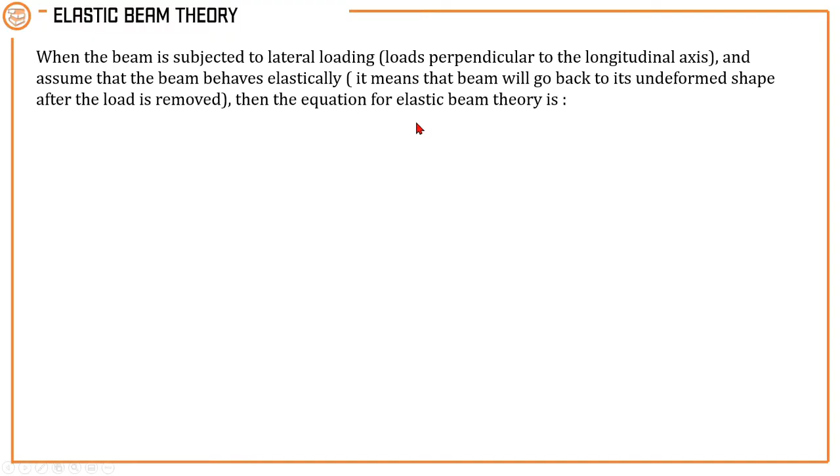And recall from strength of material, elastic beams are beams that, when loaded, will deflect. Then if we remove the load, it will return to its original shape. So then the equation for elastic beam theory is given by this one, wherein rho is the radius of curvature of any point of the elastic curve. M is the internal moment at any point of the beam.

E is the modulus of elasticity of the beam. I is the moment of inertia of the cross section. And if we multiply E and I, that is the flexural rigidity. So what we're going to do here is to derive this formula. Kung paano ba nangyari ito.

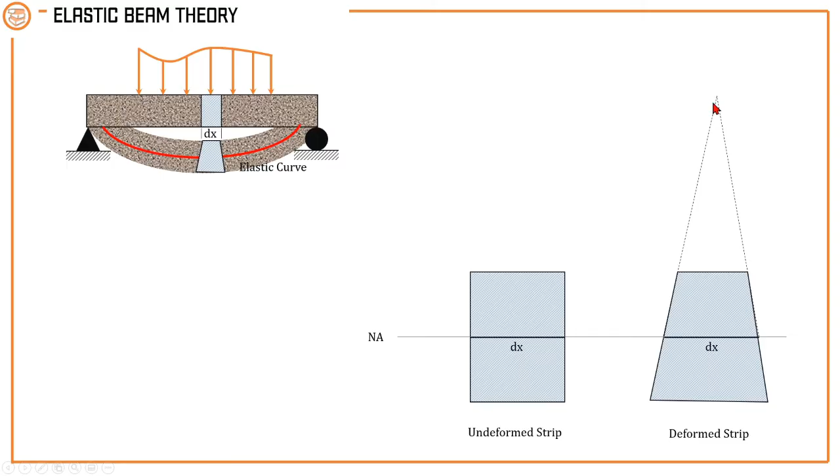If we will try to extend this length such that this will intersect, let's say that is point A. And if we try to measure that intersection point to the neutral axis, that is called the rho or the radius of curvature. Kung paano yung pagkakakurba nito. Actually, this is curved talaga. But since this is a very small strip, inassume natin na magiging almost straight na lang to. Since curved nga siya, meron siyang radius of curvature.

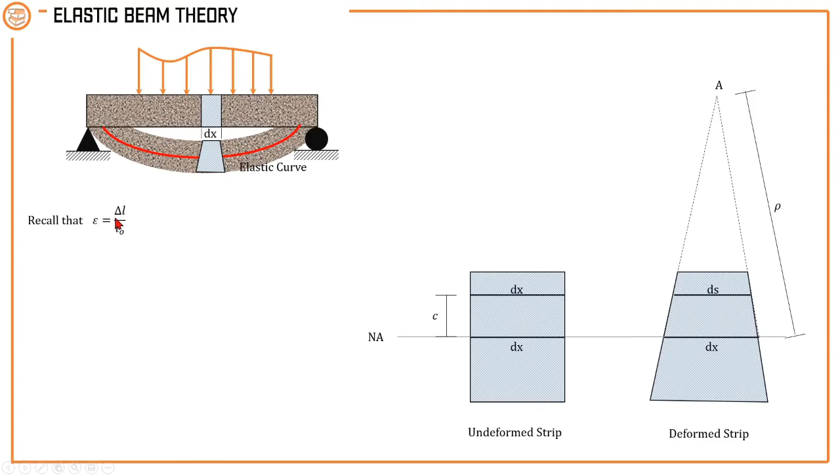Recall natin from strength of material, strain is equal to the deformation or delta L over the original length. If we are going to get the strain at a distance c from the neutral axis, ito yung magiging strain natin. dx, the original length, minus ds, that is the deformation or delta L, over the original length, which is dx. Simplify natin, ito yung kakalabasan: 1 minus ds over dx. Let's say this is our equation number 1.

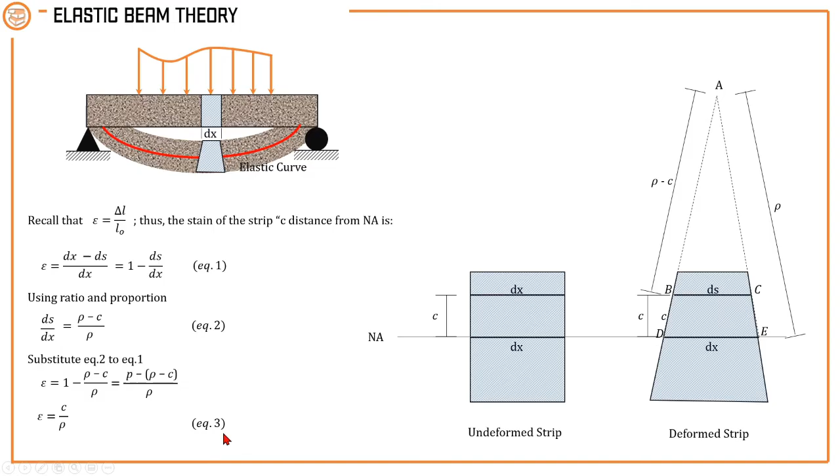Next, recall natin Hooke's law. Strain is equal to stress over the modulus of elasticity. Pwede natin i-substitute itong stress over E sa equation number 3. So stress over E is equal to C over rho. That is our equation number 4. And from bending stress of the beam, stress is equal to Mc over I, or the internal moment multiplied by the distance C from the neutral axis over the moment of inertia.

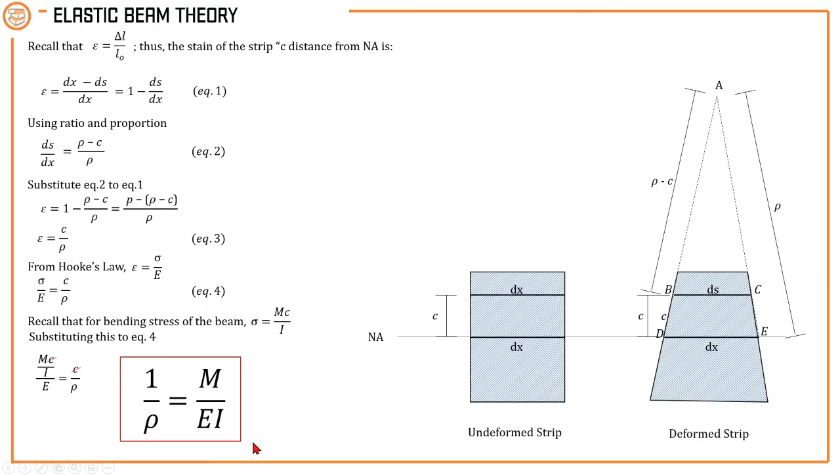We can substitute this to equation number 4. Therefore, we have Mc over I, all over E, equal to C over rho. We can cancel C here and C here. Therefore, this is the formula for the elastic beam theory. Itong formula na to, gagamitin natin to derive formulas sa ating double integration method. Makikita niyo siya sa next part of this video.